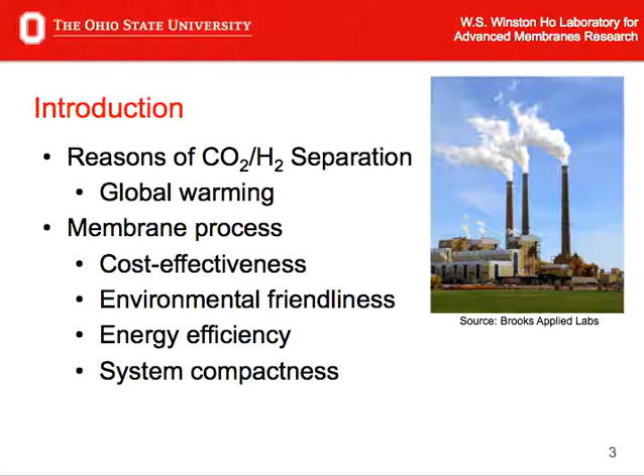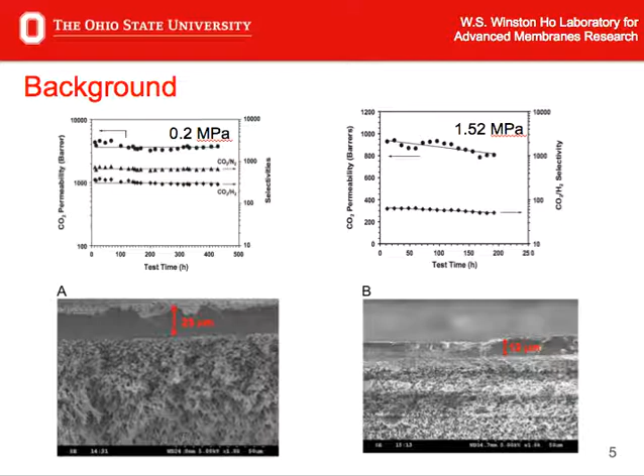So it is necessary for the polymer membrane to be well synthesized to be equipped with both high permeability and high selectivity. Also, it is important for us to care for the trade-off relation between the permeability and the selectivity and the stability of the membrane. The compaction under high pressure is one of the most important reasons for the membrane instability in permeability and selectivity, due to the decrease of the amount of free volume.

Now it is still a challenge for membranes to achieve the requirements for industrial syngas purification at high temperature and high pressure. However, the incorporation of MWNTs within the PVA polymer matrix, which contains amines as CO2 carriers, may be a potential method to solve the instability problem caused by membrane compaction.

The primary aim of the research is to synthesize a new kind of membrane with facilitated transport for CO2/H2 separation at high temperature and high pressure. We will synthesize the new mixed matrix membrane by incorporating dispersed MWNTs within the cross-linked PVA polymer matrix, which will contain amines as the CO2 carriers.

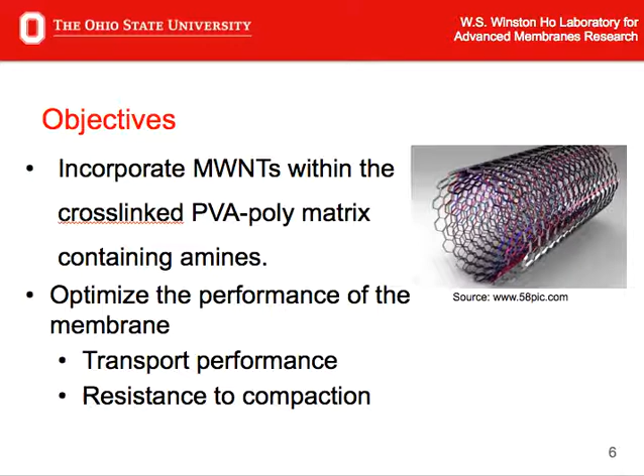We hope this kind of new membrane can display better transport performance and stronger resistance to membrane compaction under high pressure. We will use the solution casting technique to synthesize the new kind of membrane. We will add the MWNTs dispersion, the cross-linked PVA solution and amine carriers to get the casting solution, and use knife casting and curing to get the 3-layer composite membrane.

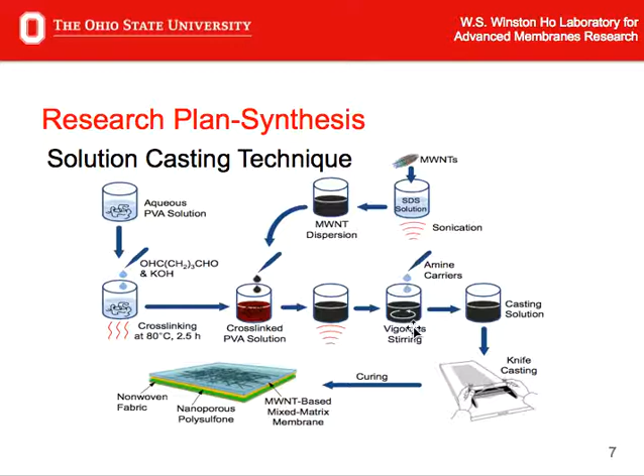For the characterization part, we will use FTIR to get the chemical structure of the new membrane. We use the UV test to test whether the MWNTs have been incorporated, and use SEM to get the morphology of the cross-section of the membrane, so we will get the thickness of the membrane.

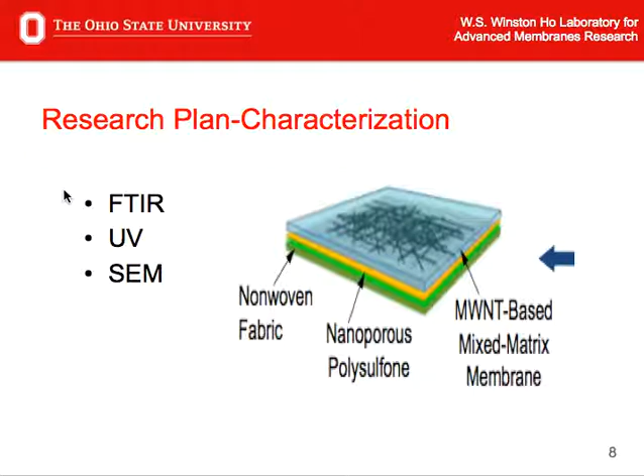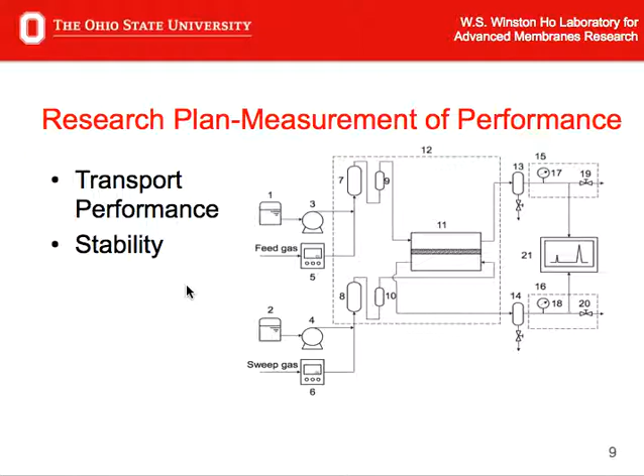For the measurement part, we will use the gas permeation apparatus for the measurement of the membrane transport performance. We use the syngas as the feed gas and argon as the sweep gas, and get the GC data to test the stability, permeability, and selectivity of the membrane.

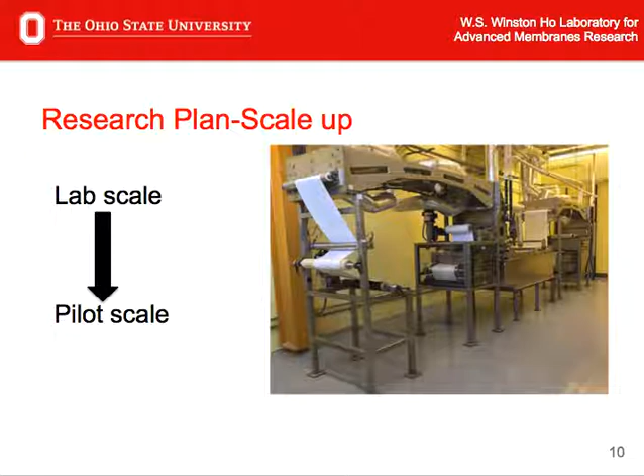In the final part, we will use the scale-up machine to take the membrane from the lab scale to the pilot scale, so it will have the chance to be used in industry. For the expected results, we hope that we can get a membrane with high CO2 permeance, high CO2/H2 selectivity, and good stability, especially compared to the mixed matrix membrane without MWNTs.